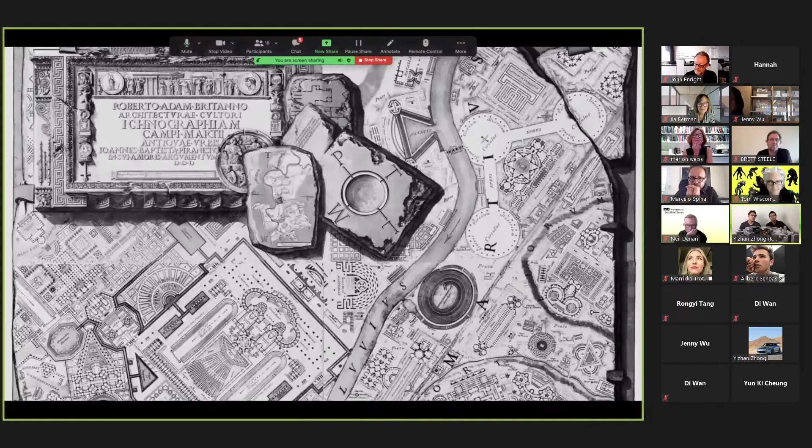We began the thesis by cataloging how solid, void, figure, and ground can be used to create different but still equal relationships. A void, often silent yet powerful in its presence, has historically been used to separate, redact, and remove. Our thesis looks to activate the void as a connector and no longer see it as a separator.

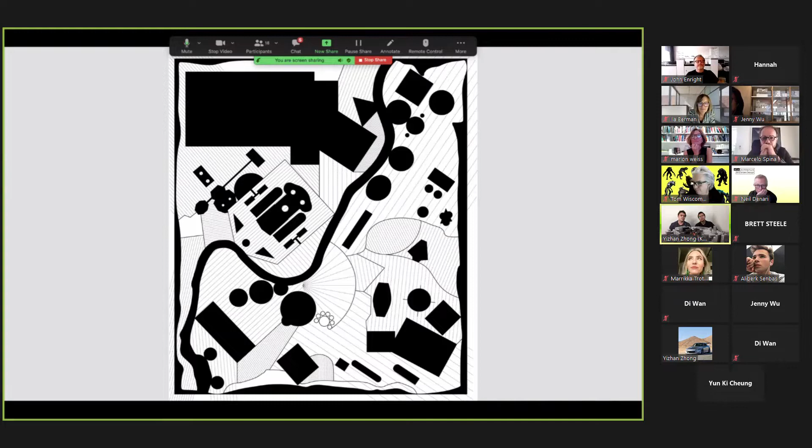So we studied different stances of previous architects on the part-to-whole discourse, shifting our focus towards a new understanding of this relationship by emphasizing the void.

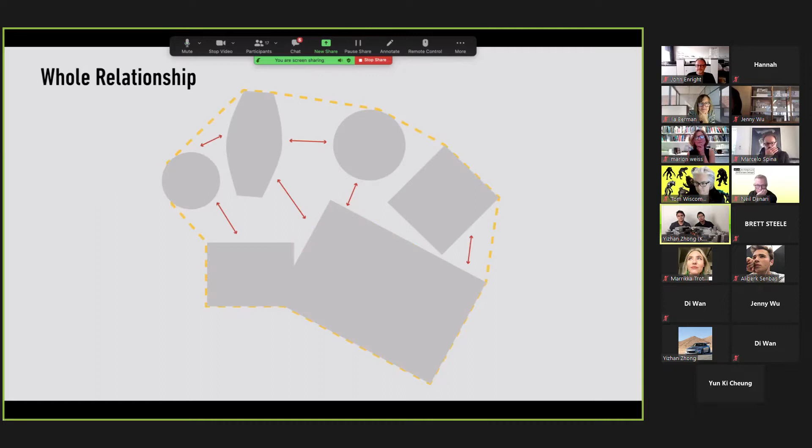By taking a closer look at Piranesi's Campo Marzio, we began to define the parts as their own volumes. The notion of the whole is defined through the relationship between the different autonomous parts, yet the third thing, the non-figure, the void within Campo Marzio, is a medium which establishes those relationships.

Our project is the replacement of the Paul-Henri Spaak building that houses the central functions of the EU government in Brussels. We selected the European Parliament for our site as it not only involves its own part-to-whole relationship within the city, but also brings attention to the political relationship of the Parliament regarding a collection of nations.

This is a bilaterally symmetrical, high-tech neoclassical building, set in a city that was built on the idea of inequality. It is situated in the heart of the European capital, founded on the exploitation of non-represented people from far away.

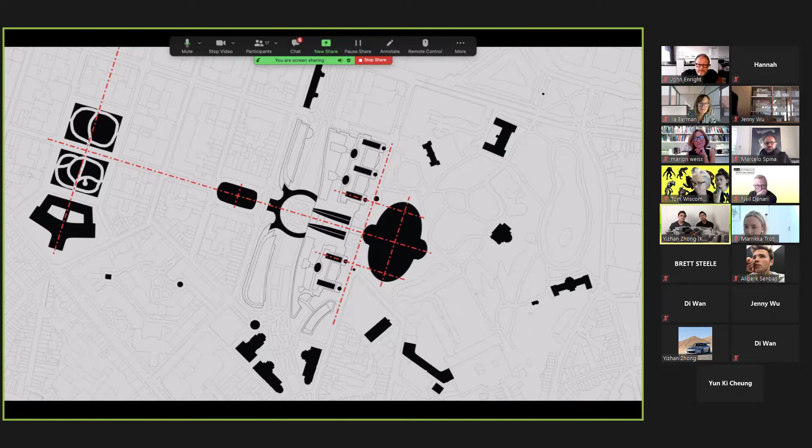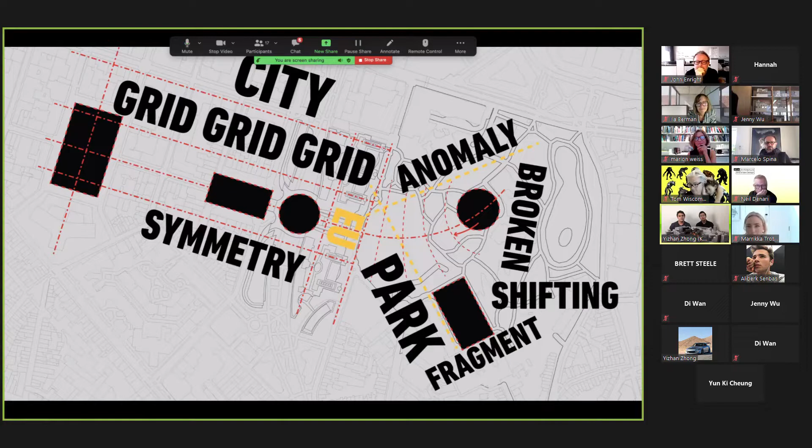Looking at the relationship of the city and the park, we notice that the city is dictated by lines of symmetry, while the park, on the other hand, acts as an anomaly to the city and is dictated by fragmentations. The notion of a parliament in itself evokes a sense of multiplicity, distinction, and power.

Our proposal for the Paul-Henri Spaak building emphasizes those qualities through continuous voids. The project begins by taking apart different programmatic volumes of a parliament and defining them as their own objects.

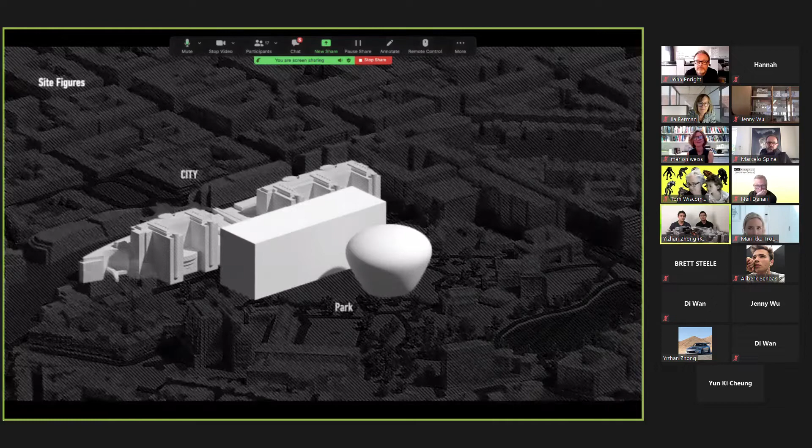We then decided to take the existing building and pull its program apart, subjecting it to intersecting voids that were given as much figural presence as the existing components.

The volumes, however, maintain their own identity and purpose within the parliament, yet relate to one another when placed together.

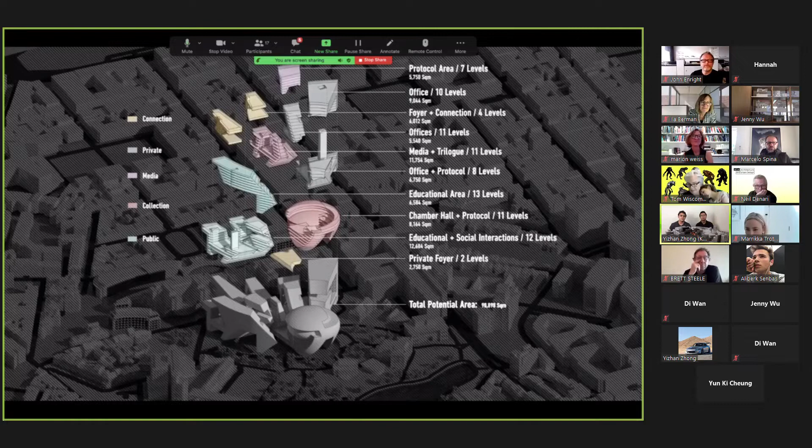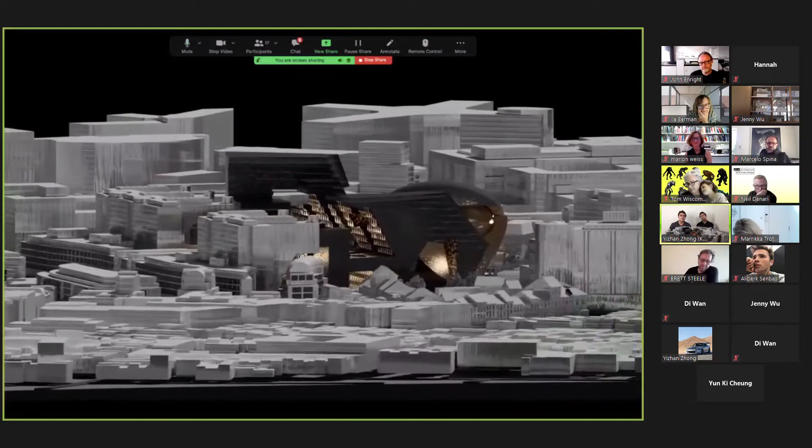We can see how each part of the parliament is separated into its own autonomous volume, which reacts to the surrounding context. The void now acts as a connector between the different volumes of the parliament, as well as the city.

By cutting through the opaque autonomous volumes of the parliament, the void not only serves to establish an internal connection, but also as a means to reveal the inner complexity of the parliament.

By covering the void in a highly perforated reflective copper material, we use these faceted planes to activate the void in contrast to the muted solids.

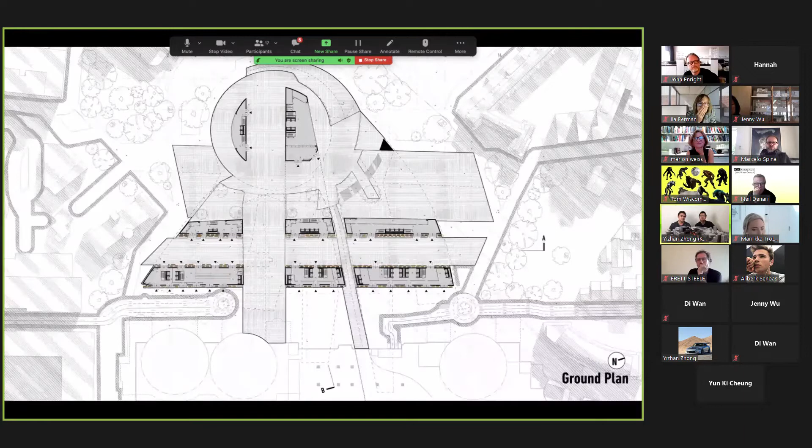In this plan, it shows how the void is connected to the building to the ground and integrates public circulation throughout the building.

In this plan, we see how each figure maintains its own presence and show us how the officials enter the building through the bridges which attach to the old parliament.

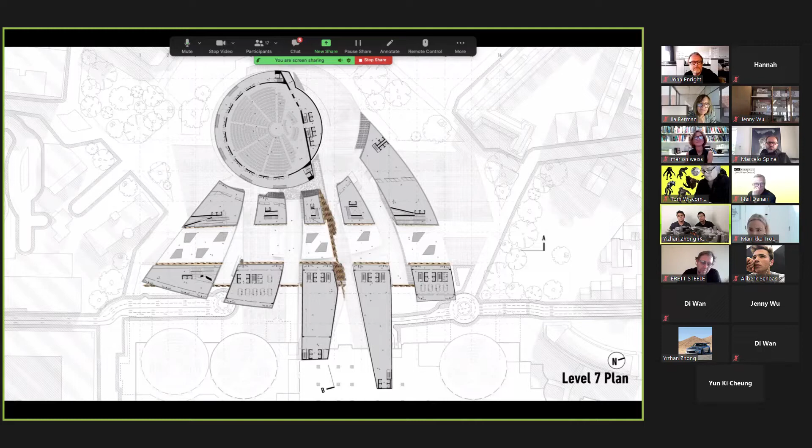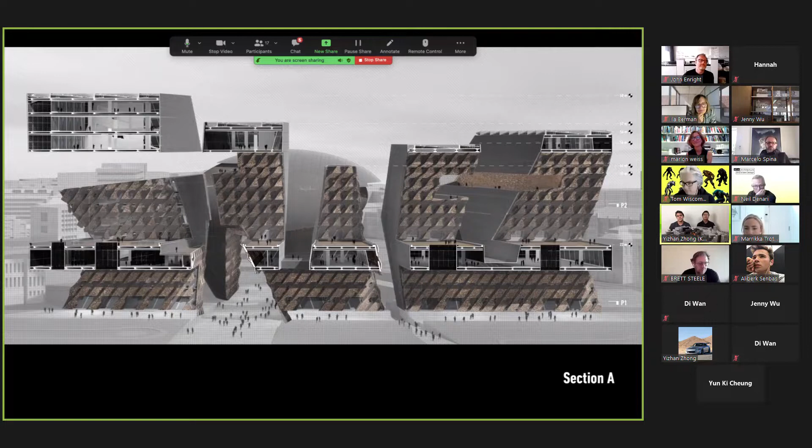Here we see how the new parliament attaches to the old building through a bridge, and the atriums within each figure establish a vertical relationship from within.

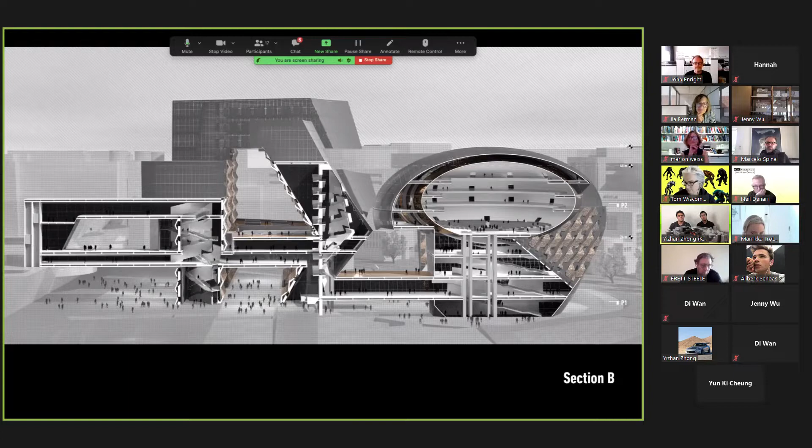So, footnotes from within. For the ending of the presentation, we decided to look into the experience of the back-of-house users of this building, as they are seen as a void in relationship to the intended occupants of the building. First, the security guard.

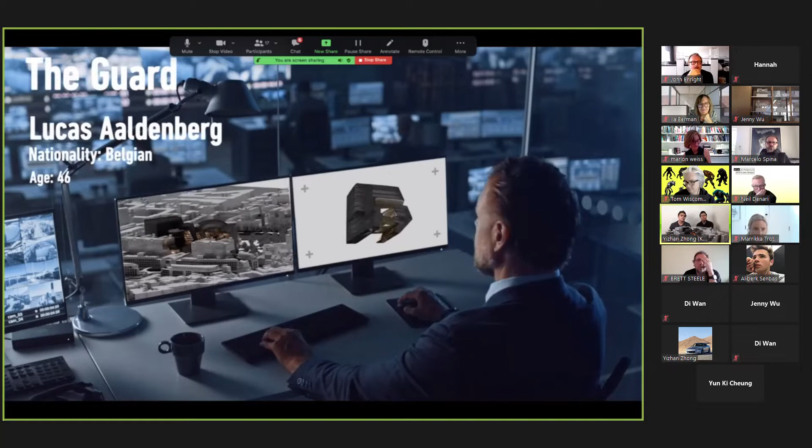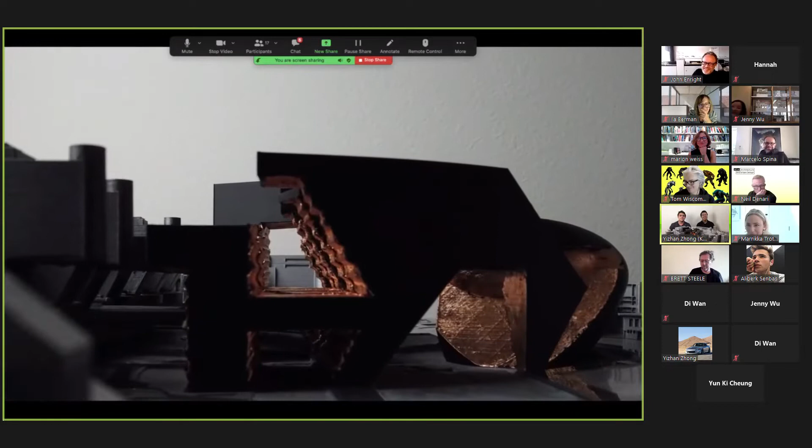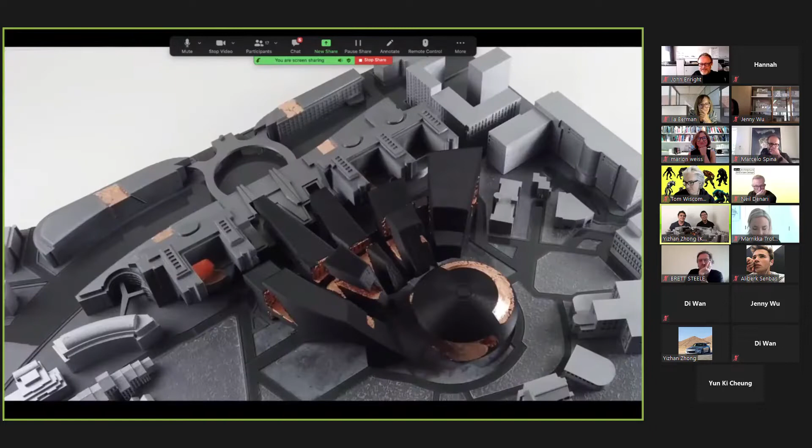I've been working for the old parliament for the past 10 years, but this new building scared the hell out of me. At first, I thought all the holes and paths in it would be a nightmare to look after. But after going deeper into the layout, the integration of the public in the building is quite streamlined. Even though it's open, it is safe, as there are many security buffers between each section.

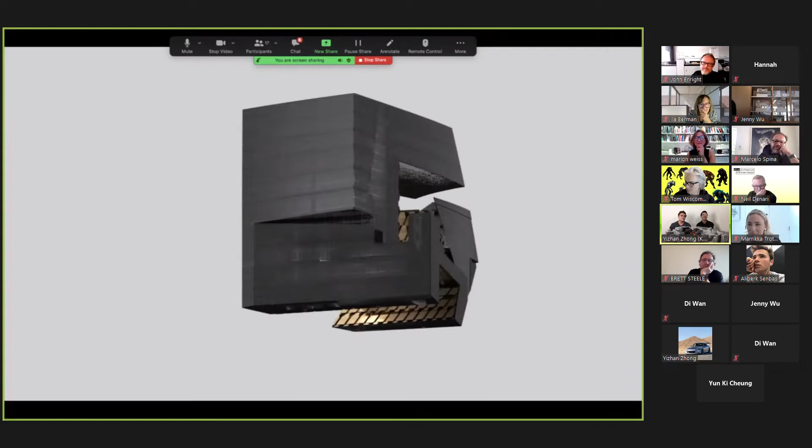Here, take a look at this. Right now I'm keeping an eye on Sector C, which has the German, Italian, and French offices. I'm able to view many things at once because of these enormous voids cut through the architecture. So instead of having to do everything through cameras, I've realized I can actually see for myself to a degree that surprises me, making my job more interesting. And then we take a look at the janitor and his experience cleaning the void.

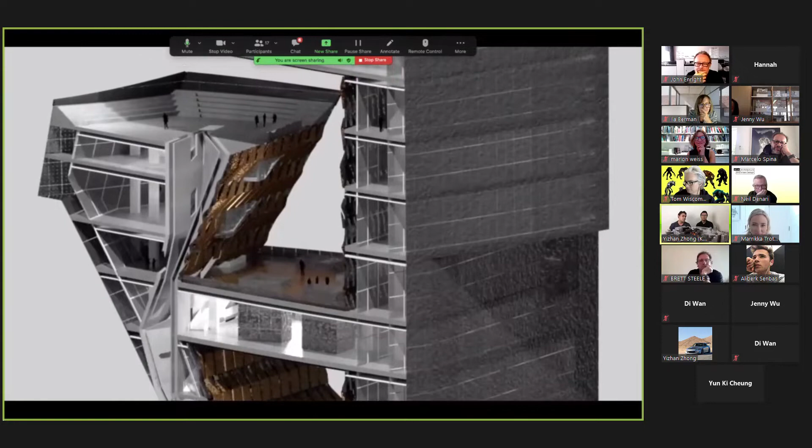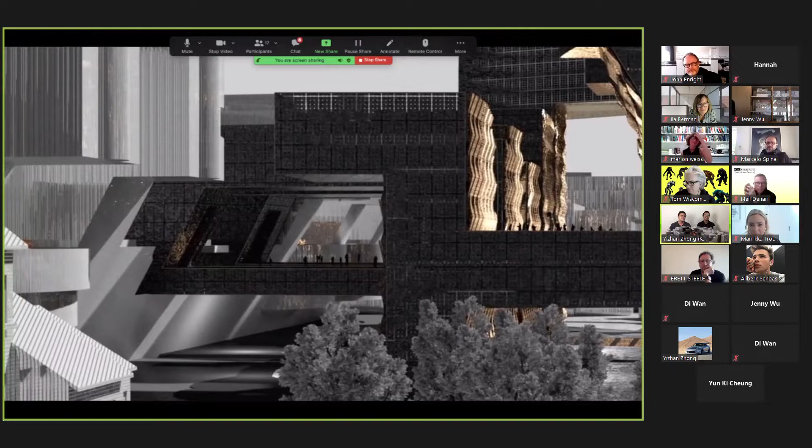They hired me about 6 months ago after I left my country looking for a fresh start. I was lucky to get the job because they had just finished building these towers that expand and hover over the old parliament. I have learned my way around this place, or at least the parts I am allowed to work at. Today I'm looking after the European Nations Hall and the giant copper void.

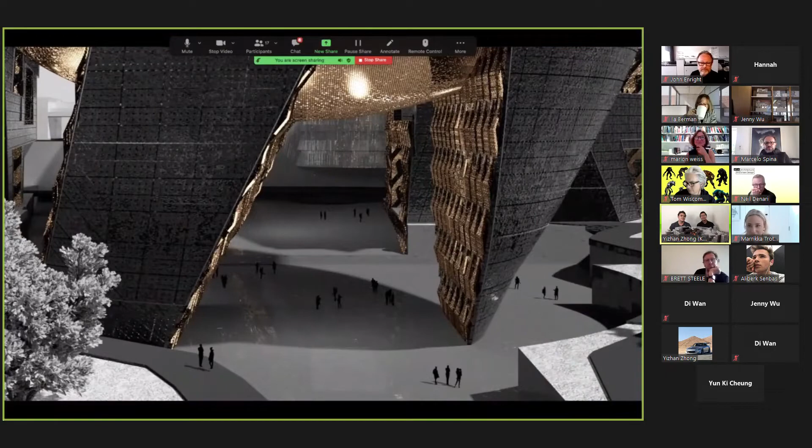Working here is strange. Sometimes I can't tell whether I'm inside or outside the building. While I see everyone going on about their day, I feel like they don't see me. It is not because I'm a refugee or that I look a certain way, but when I work here, I'm invisible. I am a hidden figure.

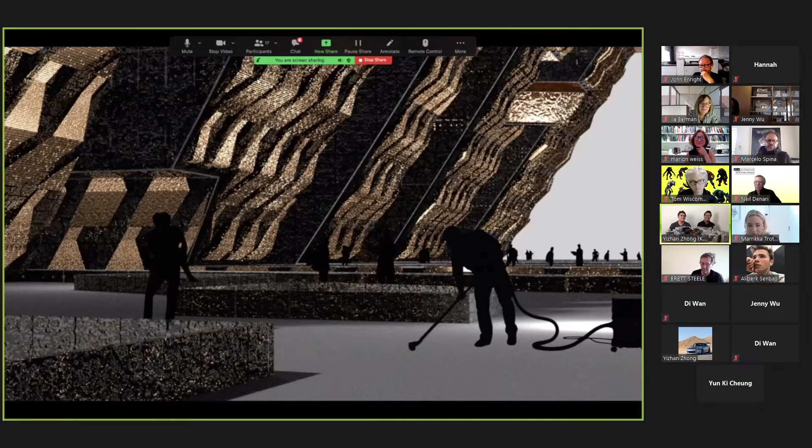I used to be a doctor in Aleppo before I moved here, and I'm grateful to have the job. But I'm not planning on staying a janitor forever.

Considering the scale of these voids, we notice that this project is quite experiential, where one goes inside the void and looks out to the surrounding city, creating a dialogue between the building and the site. By fighting for a tense equivalence between figure and void, we are taking this opportunity to express a new form of radical equality, where what is given is only as much weight as what could be.

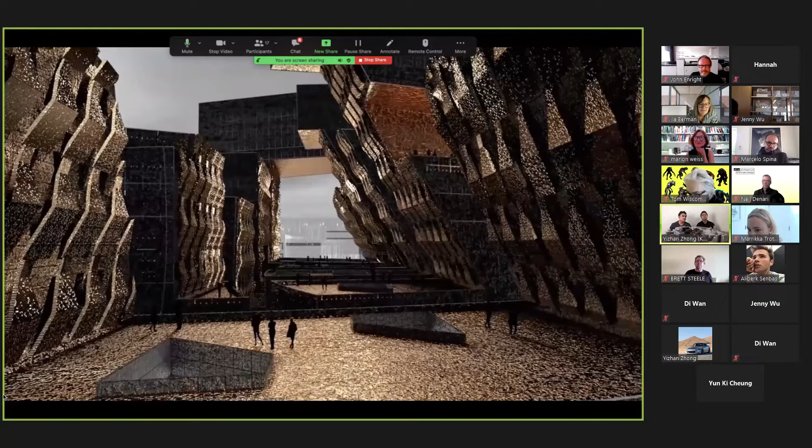So in other words, what's there now, which would translate to solid, figure, mass, would be held back in favor of the void. Thank you.

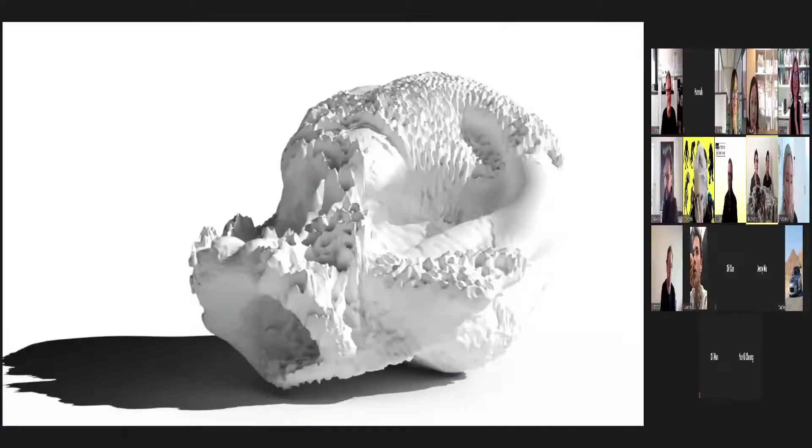Guys, I just love that line that you decided to end with. I think it's a good mantra for architecture. What did you say exactly? What is given is only as important as what will be, or what could be... what is given only as much weight as what could be.

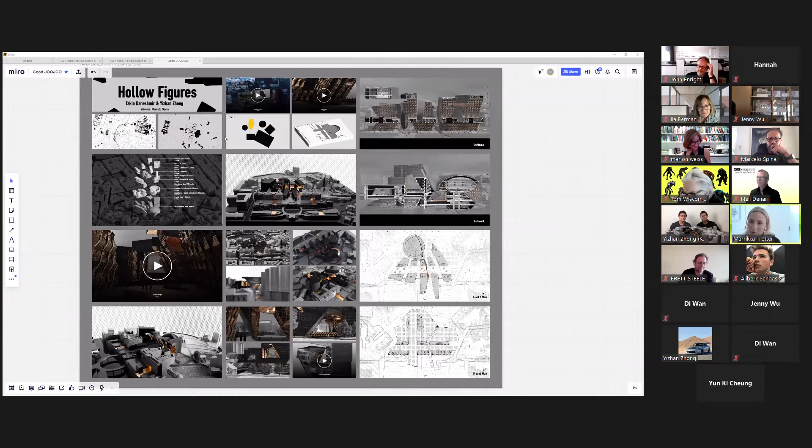Yeah, and here you're using it to talk about the difference between the absence, the figure that's represented by void, versus the figure that's represented by mass. But you're also making a larger disciplinary claim here that has to do with context and with the future, the futuricity that's inherent maybe in architecture, and that perhaps sometimes we forget or lose sight of in our drive to satisfy existing voices and fulfill expectations.

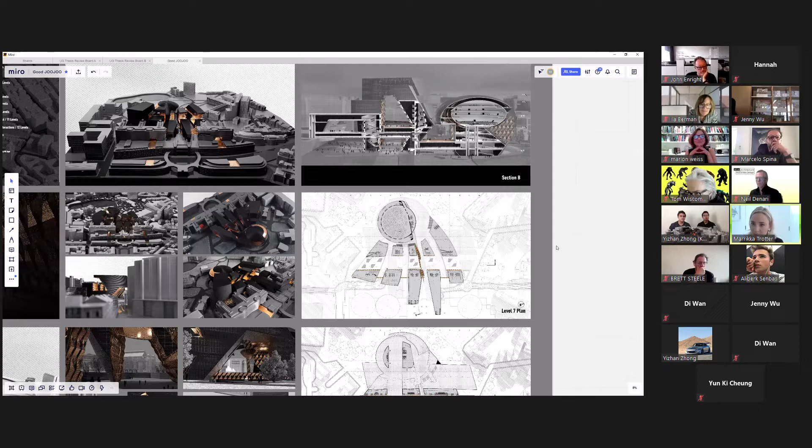I really appreciate that about your thesis. And to me, it makes it a thesis in the fullest sense of the word, because it's a way of suggesting what you want architecture to do in the world and how you intend it to operate. And it throws out the project, it goes beyond any specific project.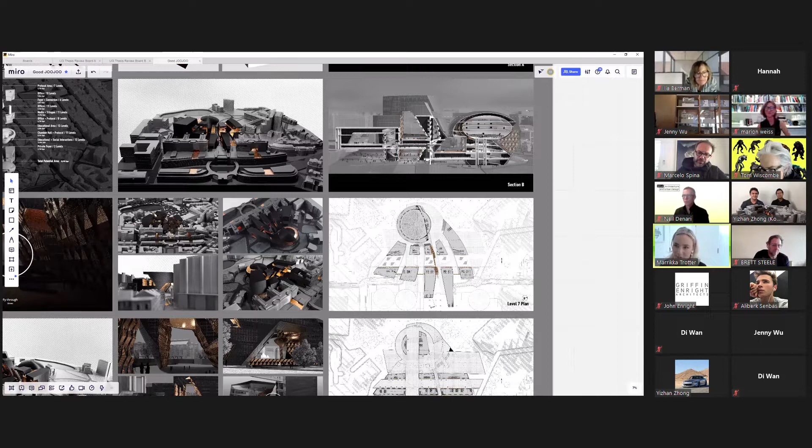Sorry, it's been a long day. It goes beyond any specific project and talks about the project of architecture as such. And to have a clear grasp on that, and to articulate it so beautifully in your B.Arch thesis project, is something to be commended. Thank you.

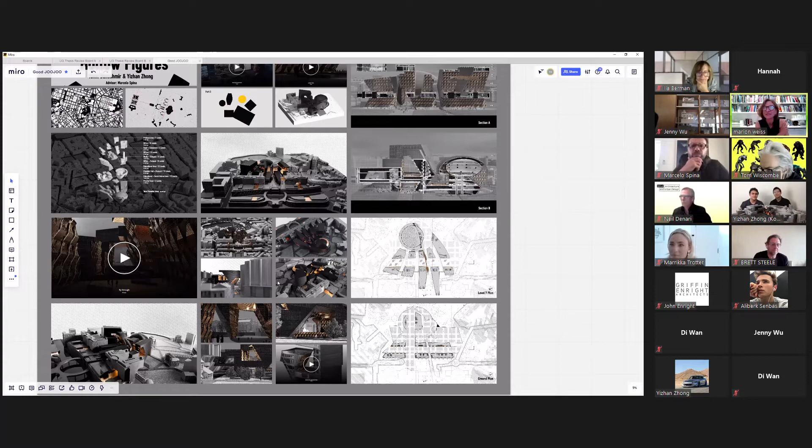Yeah, thank you. You know, I just think this is an extraordinary project, an extraordinary thesis, and what appears to be a remarkable collaboration. A couple of things I want to say: having seen this at its earlier moment, there were some wonderful things about it, yet it looked like it was really a purely formal exercise that produced a few wonderful spaces, particularly the underside and the reflective areas. I think what is really advanced are the underpinnings that have tethered it more closely to the urban narrative, which I think you get more fully.

And then also, if you will, the kind of personal experience of the typically hidden figures of the janitor and the security guard—those are elements that had not been brought into the equation when I last saw this. And yet it's those stakes in the ground of the urban and the personal that give the architectural opportunity to talk about these hollow figures as something with a public dimension. I believe it's the idea of privacy necessitated for parliamentary spaces that is given a doubling up or coupling with the generosity of public space, which is connective.

It feels like a really remarkable project that you all have done. It's remarkably smart as a work of urbanism, and of theater, because you've shared with us the theatrical, and the speculative nature of what that multiplication of reflection might be at both an urban scale and a personal scale. It's a terrifying building—a mega building, a frightening one that might be torn down not long after it's built because of the fear it might induce if it were built cheaply.

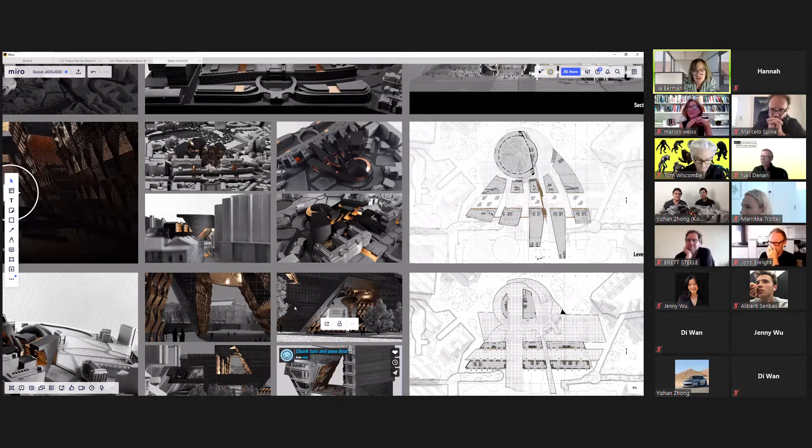I also really appreciate this project in different ways. I really like what you've done in terms of the urban condition. You started with this notion of the park as a field of scattered objects connected by continuous voids, and you create a great synthesis between these two distinct elements. I think that transformation is really pretty brilliant, and it's done really well.

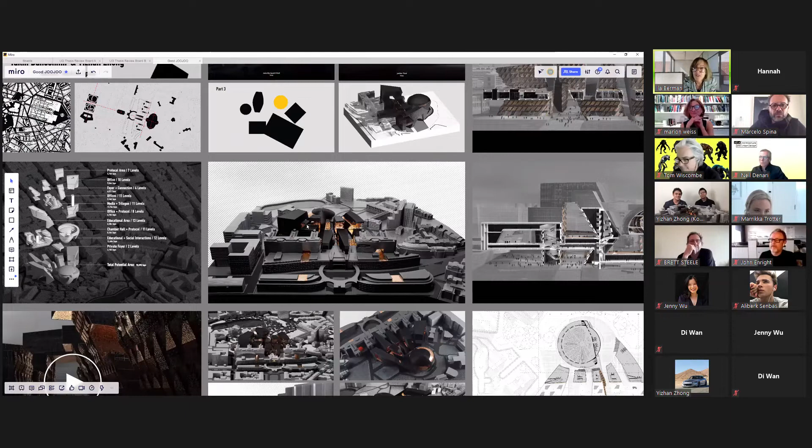I also love your sections—the sections that run through are phenomenal. I kept wondering about the difference between the visual read of the void that cuts through and connects the spaces, and whether or not there was any other actual physical connection across those spaces.

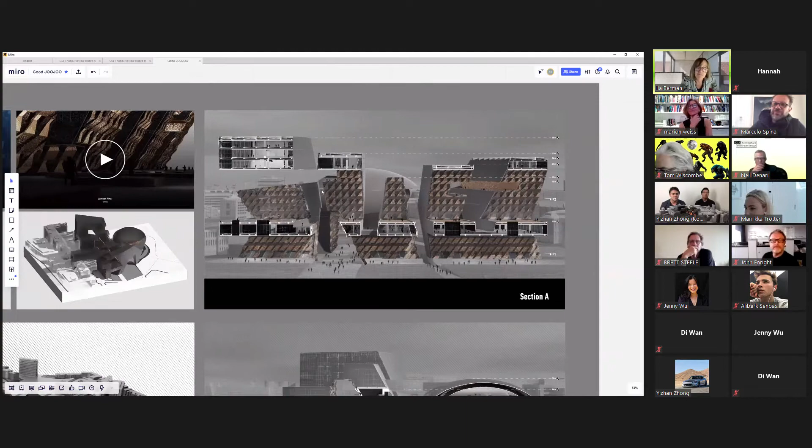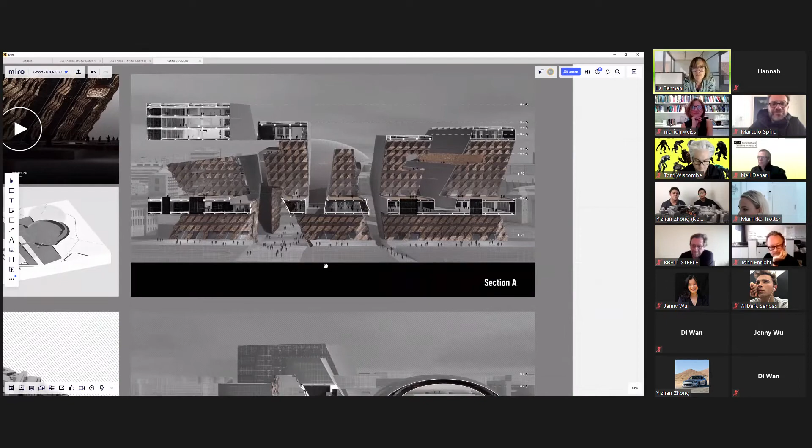I'm thinking of places like La Défense, where I can read the void, and I kept thinking, can I only read this void internally if I'm standing on one of those platforms, or does it actually connect out to the larger environment outside? That would be the only thing I would likely push you to try to do—make that connection greater. But I think it's a phenomenal project, and a really interesting way of thinking about the relationship between the voids and the figure all the way through.

So for the voids, we also used them to connect the building to the old Parliament, and I think we wanted to use them to further connect the building to the rest of the city. I think that's really the next step for us—how to use that to connect the Parliament to the city more efficiently.

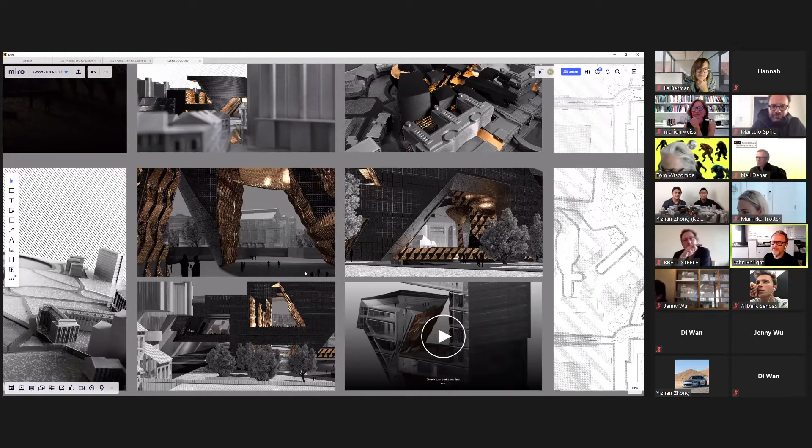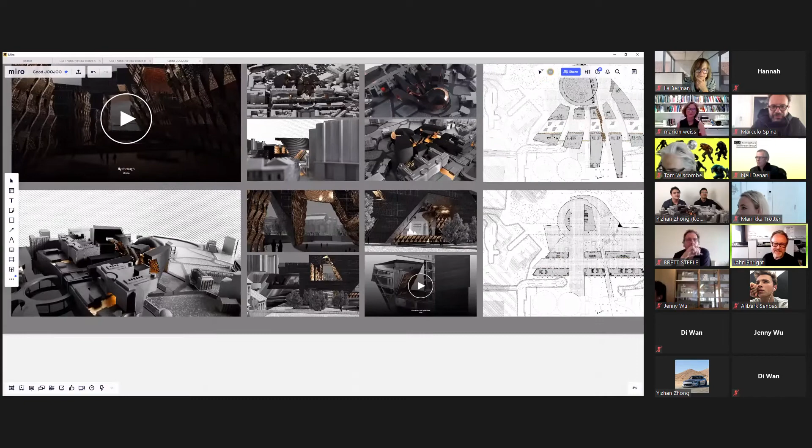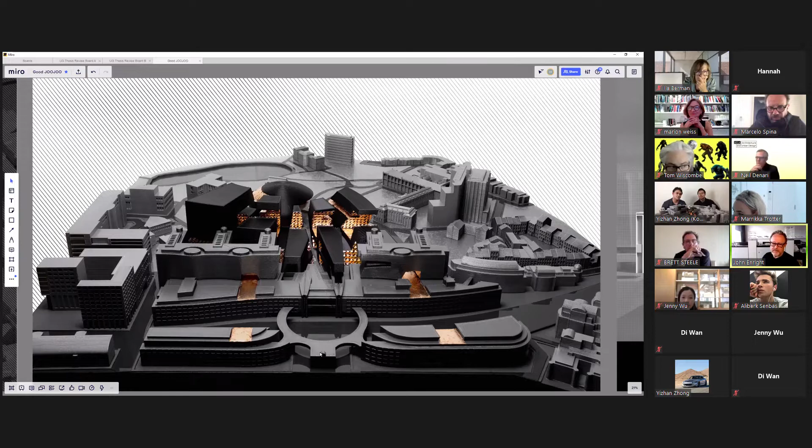What I like about it is it's a nice attack on the monumental, and the way you carve it up—these are massive buildings, huge and imposing in their character and coloring. But as a comment on the existing condition and the previous building you're tearing down, I think it's trying to propose a more accessible governmental model for the necessity of a large building to house so many offices, officials, and collective space. The way you shake it up, break it up, cut it, and fragment it, I think is its strongest case.

And I agree with all of the more disciplinary tropes of the figuring and figural space, etc. But ultimately, at the end of the day, I think its strength is within its type, as a different kind of model, maybe even of urbanism—of how to take big chunks of the city and break them down in novel ways that aren't as singular, where each plot of land has its own building with its own identity. There is a communication going on between the pieces. It could even work as a kind of Hugh Ferriss-like volume study of how to do urban plans like that.

That different lots and different volumes in a city can speak to each other across space without even connecting necessarily, but then forming a different kind of anti-monument monument. Good job.

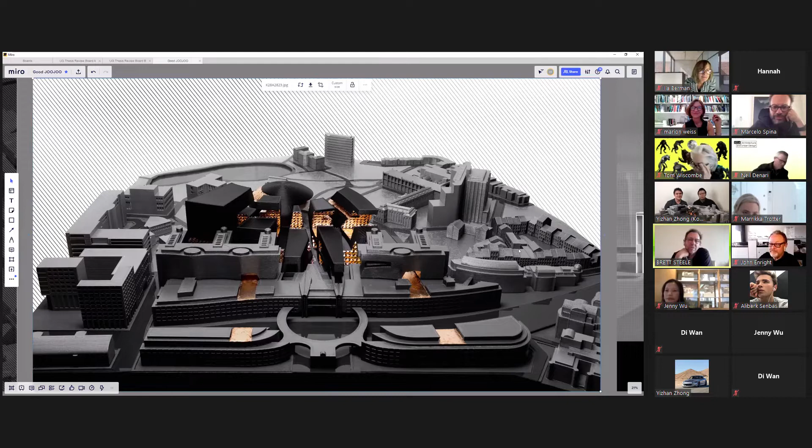Thank you. I think there's ways I can imagine the building. First of all, as everybody said, really super terrific guys, and I so want to zoom in on this weird view of the two of you over the top of your building in this model in your window to try and see it in a different way. But it's just a terrific project.

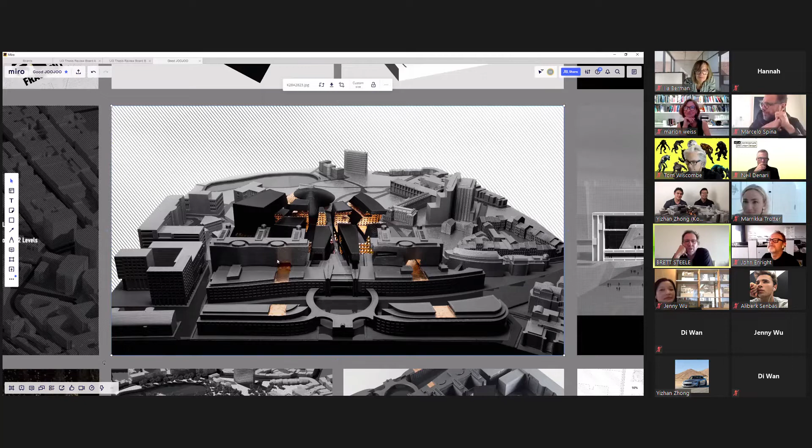I think one thing that would be interesting is to imagine that with all of the operations you've done, you're actually constructing a very different relationship between the inside of the parliament and the city around it. That is there and glimpsed at in a couple of your views, but arguably one of its great achievements is that it's not a highly choreographed, controlled relationship between the outside and what's in. In fact, at times it's almost weirdly accidental, serial. There's a number of different ways it plays out.

I think in fact, it's not a singular relationship at all. It happens in so many different and unexpected, and I suspect even maybe unchoreographed ways, that I would really try and draw that out as a strength of the project.

And by the way, that's not just a job of being on the inside and looking out, but the fact that those citizens that I presume have something to do with the parliamentary activities as subjects are looking in and seeing things happening would be interesting. And, in a spectacular way, it turns totally inside out.

The only kind of parliament example I can think of is Norman Foster's rethinking of the Reichstag, where he, like you, discovers these weird ancillary spaces, in that case a rooftop, to look down on what's happening with all of the elected officials and totally upend the conventional idea of where the public or civic space of the building is. Like the Reichstag, the rooftop of that building weirdly becomes one of the most public aspects of an architecture where that entity never even figures in the conventional typology.

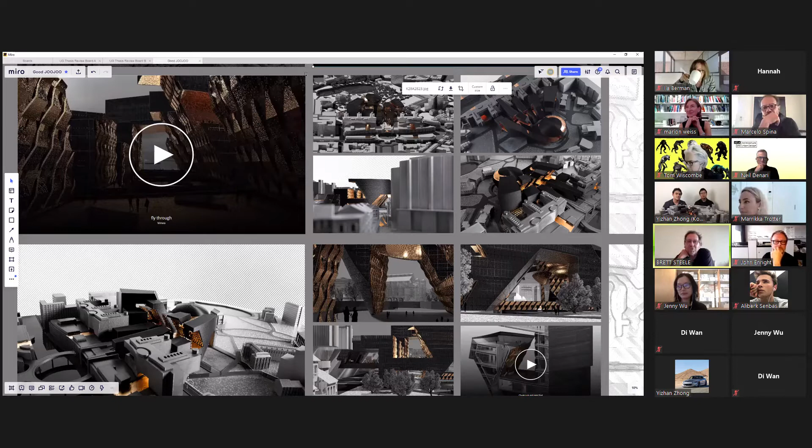And in a way, your project has those kind of moments, and it would be interesting to really make the claim that this is an architecture where things like lobbies and mezzanines, totally secondary sort of stuff in most architectural language and projects, is really elevated here to a civic and public presence. I think it's absolutely great.

And it would be the sort of architectural equivalent of you having elevated the security guard and the cleaner, that you're looking at those kind of spaces that evade the normal architectural imagination, and which, by the way, have no real defenders at all. There isn't an architect of mezzanines that I'm aware of who built a career around that. And you make that into a very different definition of what civic space is, i.e. that any space can become like that if we treat it appropriately.

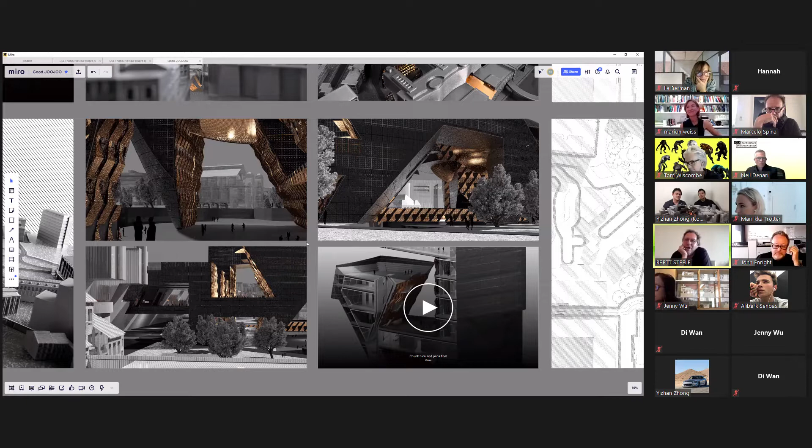And I think your project holds those kind of things all over the place. And I'm sure there are attics and basements and loading docks that could be absolutely fantastic renderings of this project, that normally is the sort of stuff architects go out of their way to ignore. I'd really make that your field of expertise and importance.

It's really brilliant. You know, it's funny, Brett, that you bring up the Reichstag, because the parliament building that this reminds me of, although it's a notoriously unsuccessful project, is the Enric Miralles Scottish Parliament building in Edinburgh.

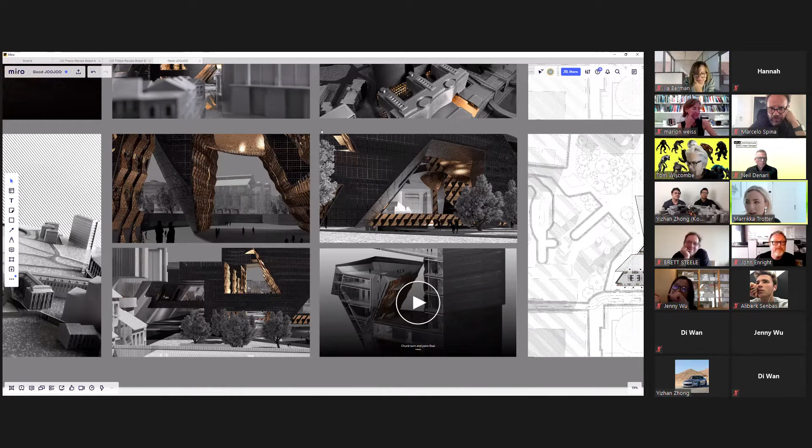But I feel like that project was in a way trying to do what you guys have actually done in your undergraduate thesis much more successfully, which is balance a sense of monumentality with maybe not fragmentation, but an acknowledgement of the kind of chunky, uneven openness that democracy might imply in built form.

It's almost like thinking about it after the fact, a kind of negative precedent, because it really is not a very successful building, I would say, but it was a kind of heroic attempt to do exactly what you guys have done, I think, quite well.

Thank you. Thank you, Marrikka.

While we're throwing out references, to me this is like Palace of the Soviets meets the Empire State Plaza in Albany. The axial array of solids in the Le Corbusier project is pushed out to the side, and water occupies it in classic imperious fashion.

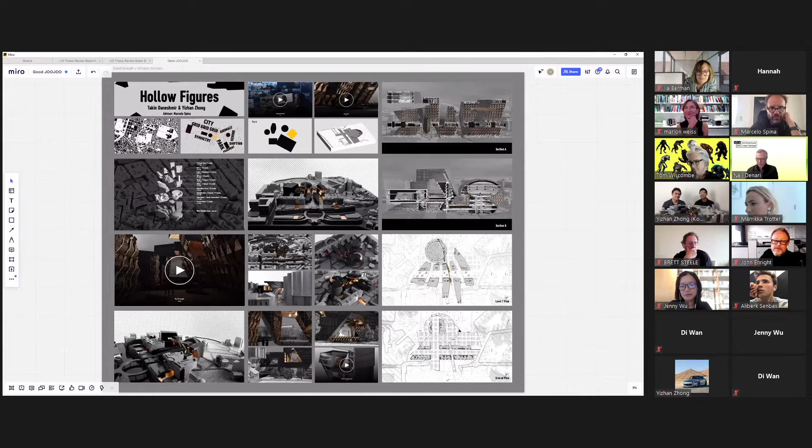Yeah, I think it's such a nice formal move, this interconnecting all of these different pieces with the void. And this image - do you mind zooming in on that at the very bottom center? Maybe just building, at the bottom row.

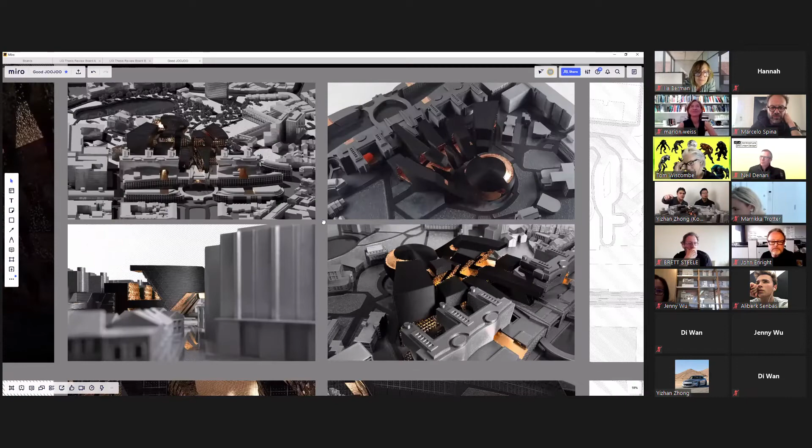You know what Brett was talking about - you were calling them balconies or mezzanines or something - but these are so powerful as kind of hinting towards an urban space that isn't just the datum from which we extrude our cities. It's so exciting to me. It points at a whole different kind of city. It's like the building becomes an image of what that other reality might be, and it's just so cool and powerful. It feels particularly contemporary right now for some reason.

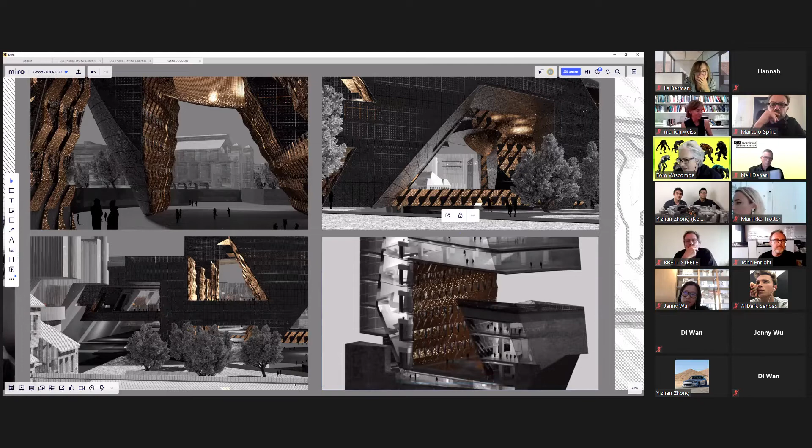I've been thinking a lot recently about giant protected indoor-outdoor spaces in architecture and how that relates to humans these days maybe not wanting to be in hermetically sealed environments, but still needing protection from the elements, maybe shade and other things. In the kind of COVID world, these feel like a mega indoor-outdoor - feels like a whole new typology for our cities, which doesn't have to do with program, but has its own formal typologies.

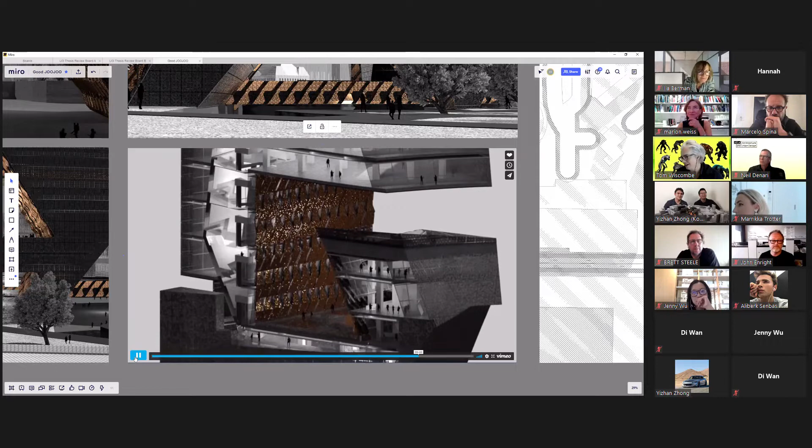The way that you render them as having almost a Baroque level of ornament and care, with mirrored surfaces inside even though they're outdoors, is so cool, because then you're just playing with it and saying yeah, it's indoor - no, it's outdoor - yeah, it's indoor. Really brilliant. And I think the fact that they're not glazed in is really good. It just seems like something really worth developing more.

It's also just an absolutely mesmerizing object, seeing it pulled off the ground like this, spinning around and back on the earth. It's very difficult to tell what's going on, but you get there with such simple moves, which I think is the sign of a really good architect. I'd say keep that up. It's really wonderful, a great piece, and feels like a post-COVID formal type.

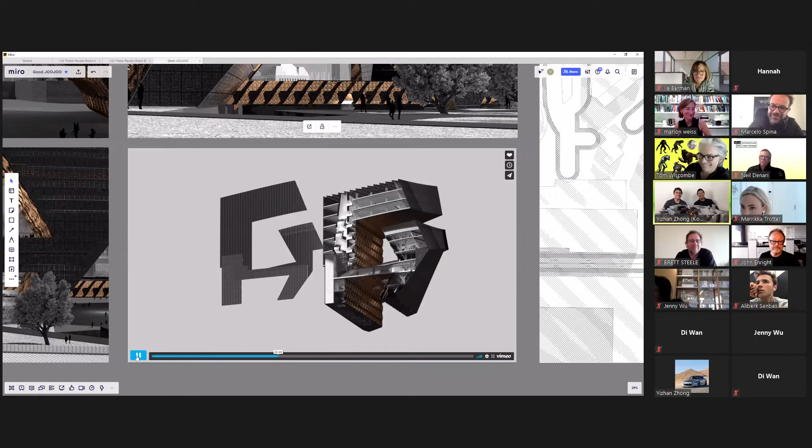I don't know, thank you, Tom. I don't know if that's good. Yeah, thank you, I mean, guys.

I was sure somebody was going to say the other reason it looks so contemporary is you can imagine an entire season of Westworld playing out in those weird big voids.

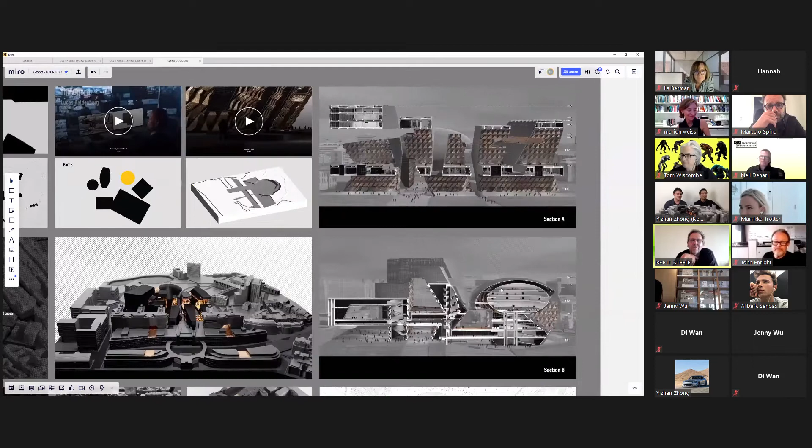It's a sort of urban landscape, and the art direction that goes into the design of this scale of building, it seems like it really is invoked by your incredibly controlled palette, your unwillingness to allow too many different kinds of things to enter onto the stage, the role of the bronze screen to tie together what would be otherwise really disparate, chunky pieces of stuff.

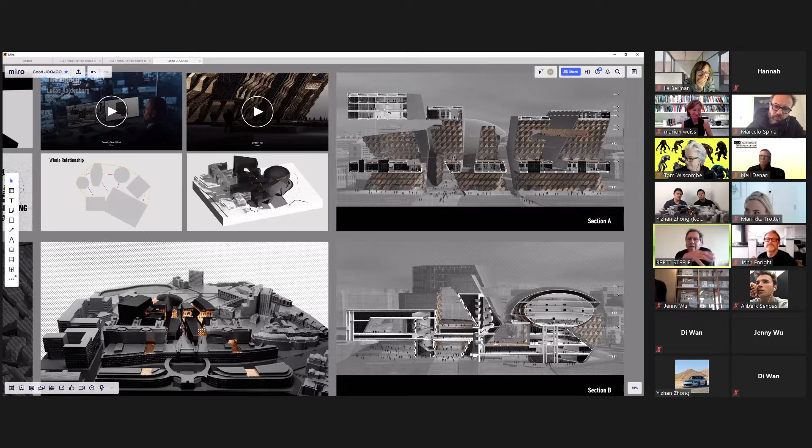That sort of really delicate balance between continuity and the dispersion of the field, I think it's just really nicely handled. I suppose that's the thing that makes it most familiar as a parliament, the idea that this sort of thing is still somehow a civic necessity, that it can't just be a pile of stuff that all of the function takes place in. That's probably something you could interrogate as successfully as the rest of the questions you put down.

Formally, I'm sure you've spent a lot of time looking at OMA's first project, the Parliament for Holland they did in '78, which is one of the few projects all of the partners and their first employee worked on together. In fact it's so fractured that they all immediately separate and divorce.

But that project is willing to handle a huge amount of each piece being a different kind of animal, to the point that it looks like, in the proudest OMA sense, a bunch of junk at an urban scale. I think you really move away from that in an interesting way, to argue for there being a certain amount of coherence, even if the formal pieces and entities, programmatic or formal, are really very different things. That's just a really cool leap past that former moment of how a collage of different pieces sit in relation to the city.

Maybe the one thing you do that's consistent with that project from '78 is that you mark out a singular field where the parliament has a beginning and an end. One thing I could still imagine with yours is that parts of these shards could have been sent out into the surrounding city or urban landscape, such that you can really undermine that civic assumption that there are beginnings and ends to where that sort of stuff happens.

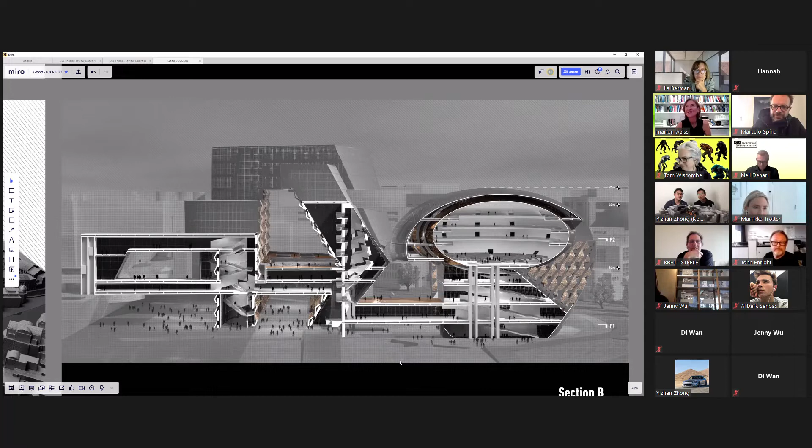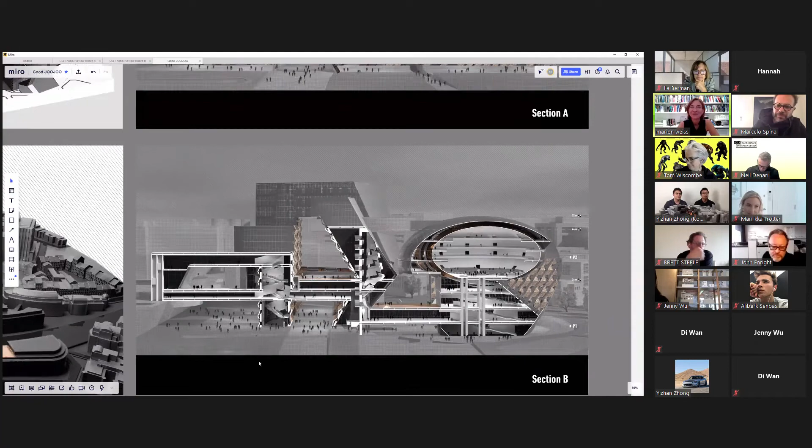Just one more precedent to look at would be the unbuilt Paul Rudolph Lower Manhattan Expressway project. Brett's comment about being deployed out into the city, there's that sense of a kind of infrastructural continuity, the multiplicity of movement systems of vehicles as well as people and inhabitation. I could imagine this would be a really fantastic project to take further into the thesis of what high density housing might offer as part of the community associated with the government, because right now it's a representational piece as a solo, but it seems like it's a new typology of urban fabric that could be super interesting.

Wow, thank you guys so much. These are great comments. Congratulations, you guys, you made it. Yeah, you made it through SCI-Arc. Many years of hard work, and you guys have been such great students. So congratulations. Thank you so much. Thank you, Tom. Yeah, congratulations, guys.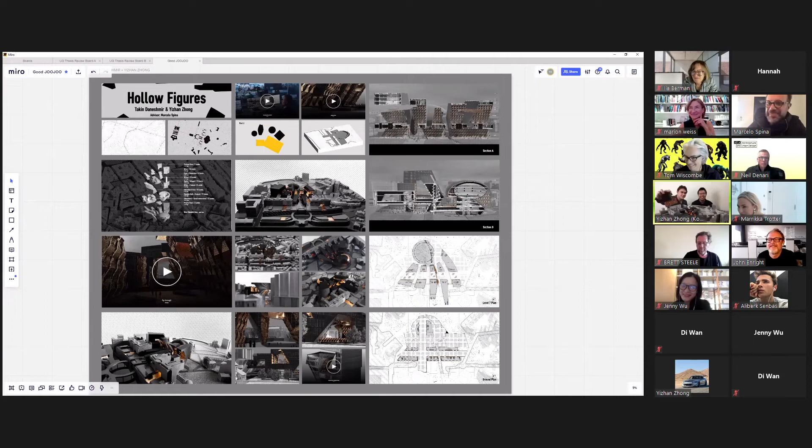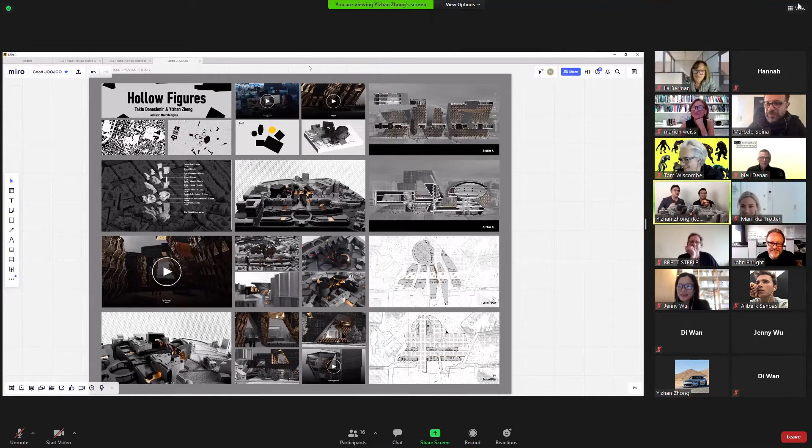Okay, I'm not joking, it's awesome and I'm glad you did that model, it's beautiful. Buck the trend, buck the trend, I love it, with the copper material. It's a fun model to play with, there's all these great different pieces. I just put you in speaker mode, everybody should put them in speaker mode now and check them out. Okay, let me turn off the share screen.

So yeah, these are the different pieces that come together, and yeah, there's the way it separates out, it's like this. Fabulous, so yeah, and they all come together.

So do we need to send the fire department over to lift that model off you guys?

Don't throw it away, okay? Oh, of course not. I'm gonna keep it.

Cool, here's your model. So any final comments for all of our students, if there's a few? We have a couple minutes left.

I would just say really fantastic work across the board. I found all of the projects to be really incredible propositions, really interesting work and well resolved and incredibly creative. I think they were not just resolved well, but so imaginative and great propositions.

So congratulations, just echo Ila's huge congratulations. And I think that the underpinning of what I liked was that the seriousness that a thesis asks you to take on was not paralyzing as it often can be, but was actually a kind of catalyst.